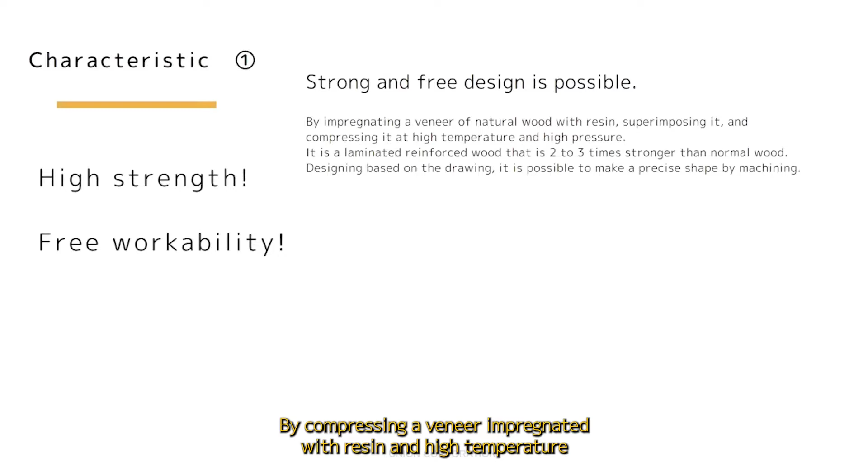We would like to explain the characteristics of Uniwood. The first characteristic is high strength and free workability. By compressing a veneer impregnated with resin at high temperature and high pressure, it can exhibit 2 to 3 times the strength of ordinary wood. Due to this high strength, precise processing with free design is possible.

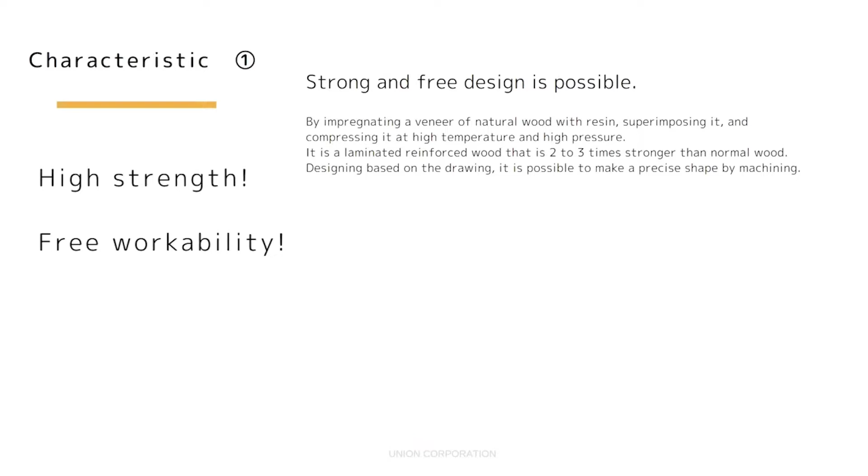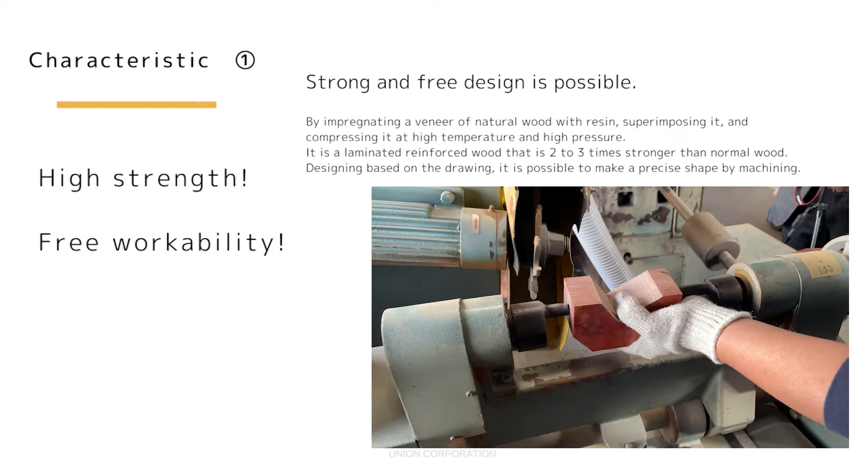Now, let's take a look at the processing of the lever handle UL502. You can see that it can be processed in any shape.

The high strength of Uniwood also enables direct tapping. There is also a video of tapping, so please have a look.

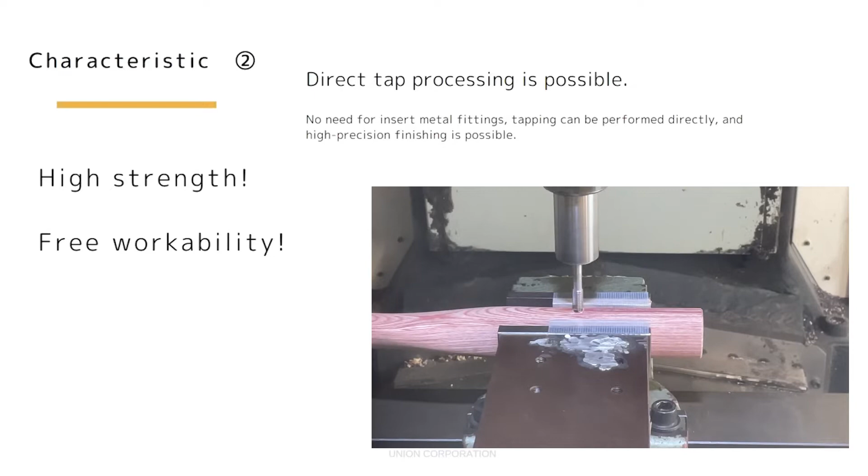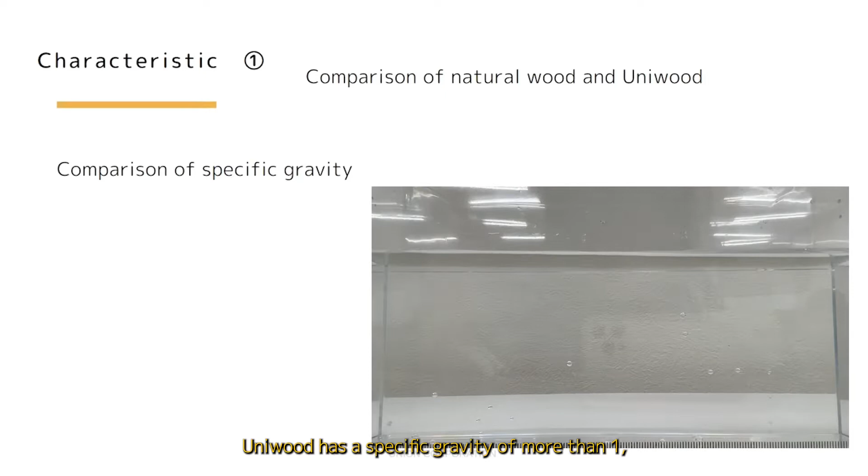Next, we compared the specific gravity. Uniwood has a specific gravity of more than 1, so it sinks in water. Although it is made of wood, its high density makes it stronger.

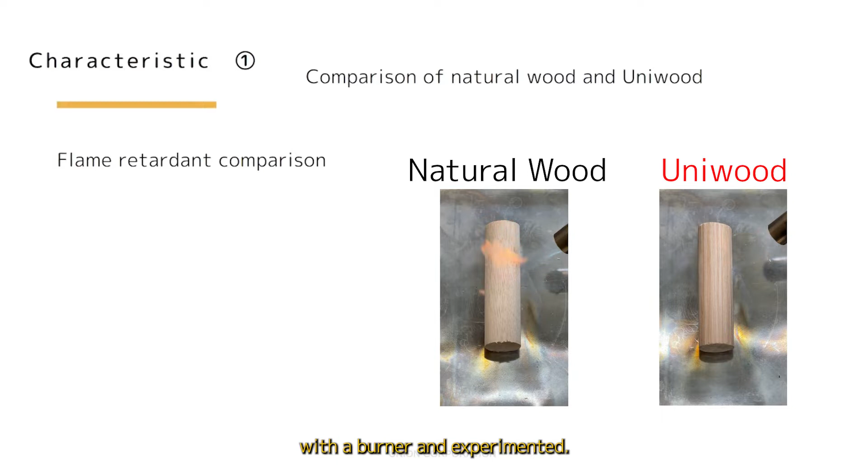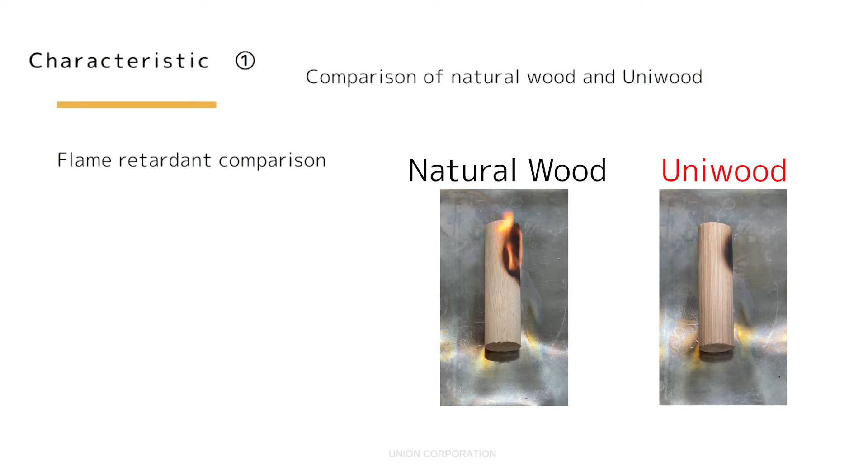Lastly, a comparison of flame retardancy. We actually scorched it with a burner and experimented. Natural wood burns, but Uniwood only burns the surface and does not catch fire. In this way, it is a flame retardant material.

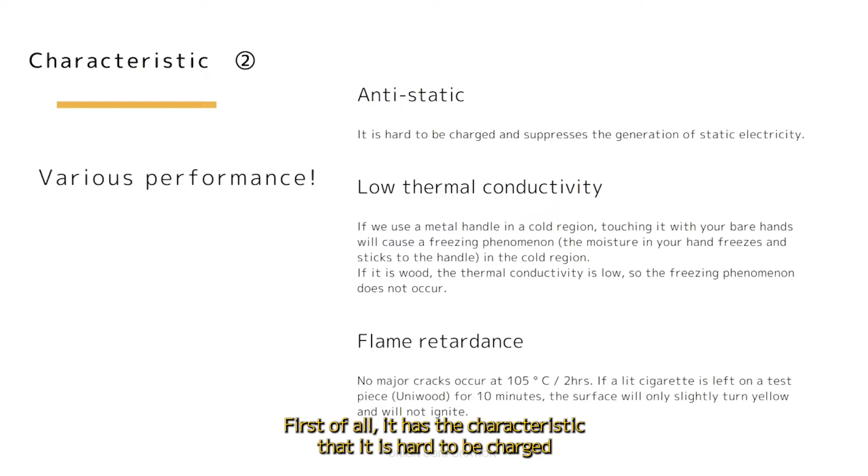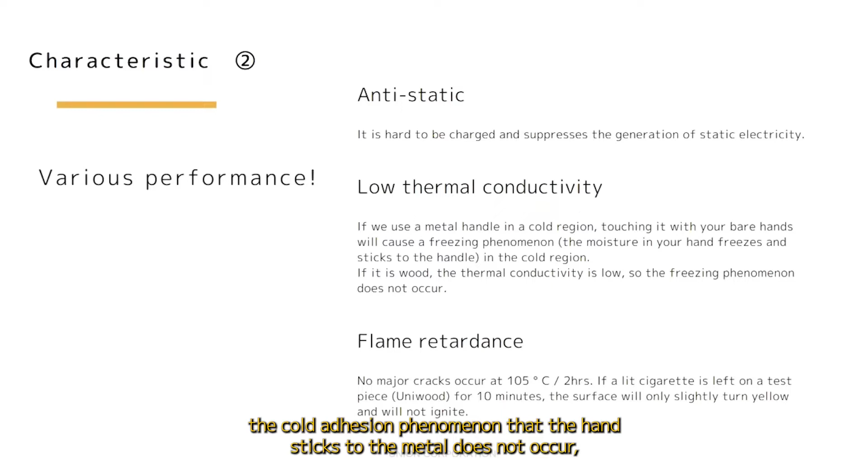Next is that it has various performances. First of all, it has the characteristic that it is hard to be charged and the generation of static electricity is suppressed. In addition, since the thermal conductivity is low, the cold adhesion phenomenon where the hand sticks to metal does not occur, especially when touching metal with bare hands in cold regions.

Also, as in the previous experiment, it has excellent flame retardancy, and even if a lit cigarette is placed on a Uniwood test piece and left for 10 minutes, the surface will only slightly turn yellow and will not ignite.

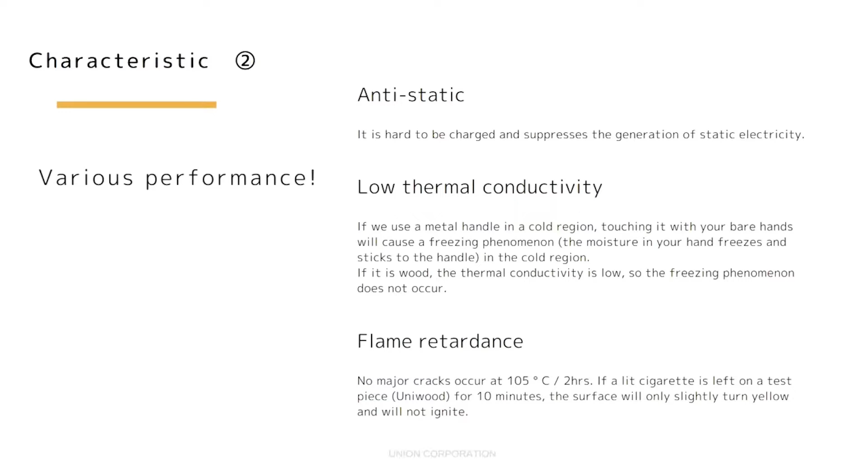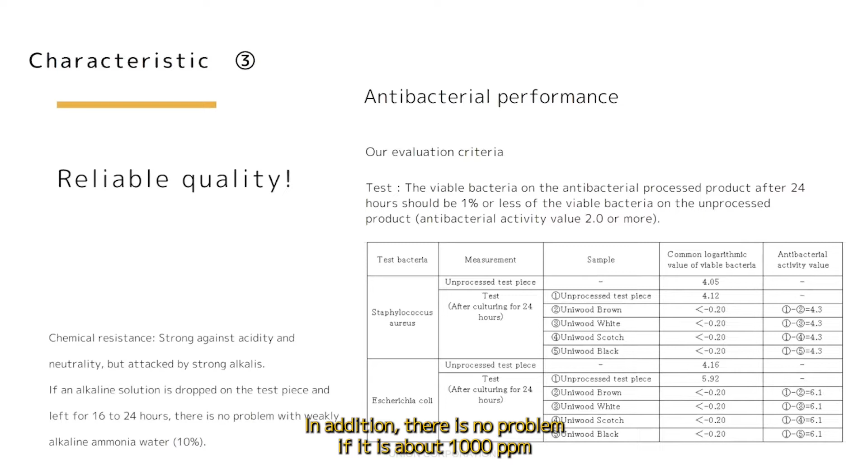In addition, it is strong against acidity and neutrality as chemical resistance. There is no problem with alcohol resistance, so there is no problem with disinfecting with alcohol. However, it is attacked by strong alkali. There is no problem if it is about weakly alkaline ammonia water 10%. In addition, there is no problem if it is about 1,000 parts per million sodium hypochlorite aqueous solution used for coronavirus countermeasures.

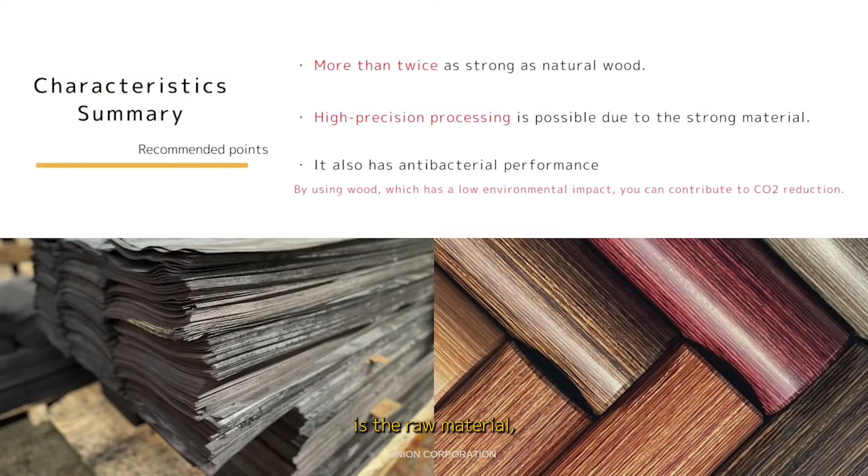To summarize the characteristics: 1. It is more than twice as strong as natural wood. 2. High precision processing is possible due to the strong material. 3. It is a material that also has antibacterial performance. In addition, since wood, which has a low environmental impact, is the raw material, it is a material that can contribute to CO2 reduction. Next, we will explain the manufacturing process of Uniwood.

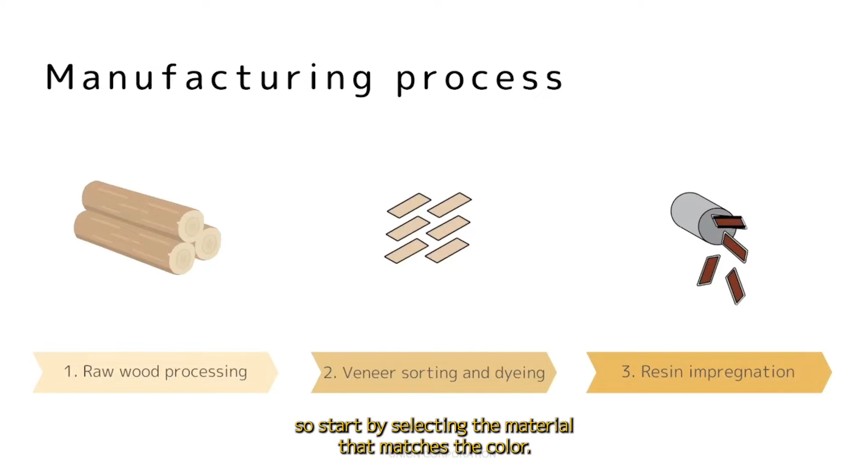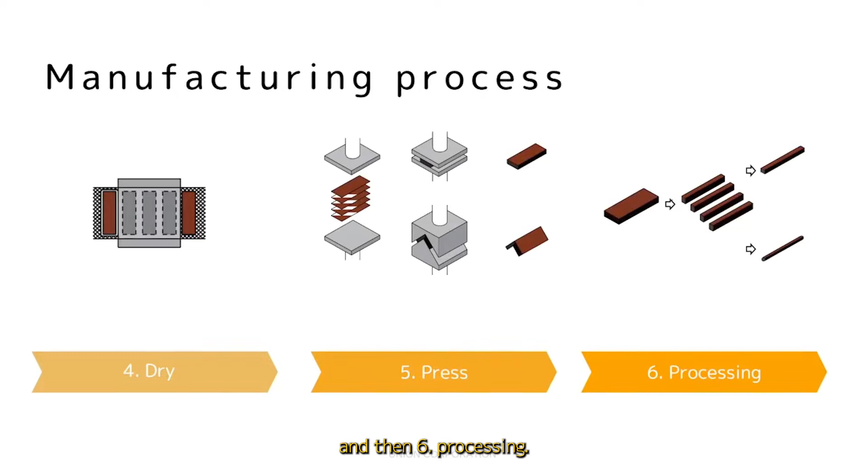First, we process the raw wood, which is the raw material, into a veneer. Next, sort the veneer. Uniwood has multiple finish colors, but the veneer used depends on the color, so start by selecting the material that matches the color, then dye it in the finish color. Next, impregnate it with resin to increase its strength. After that, dry well. Then press at high temperature and high pressure. And then process it. Now we would like to introduce the manufacturing process so far with a video.

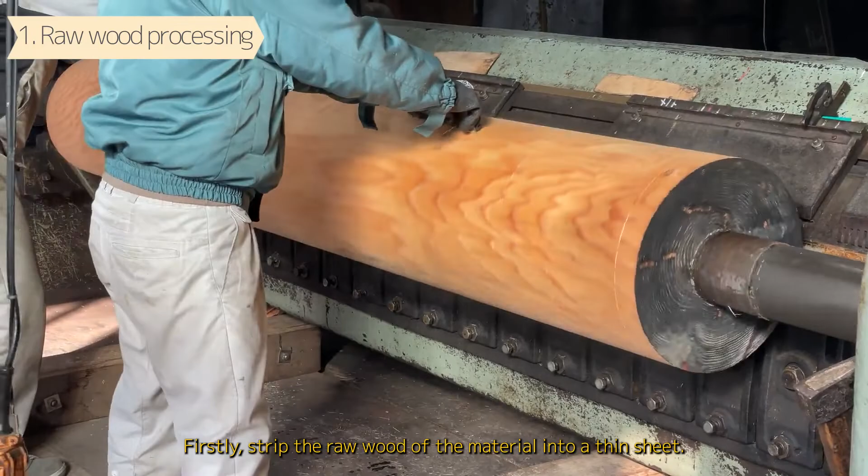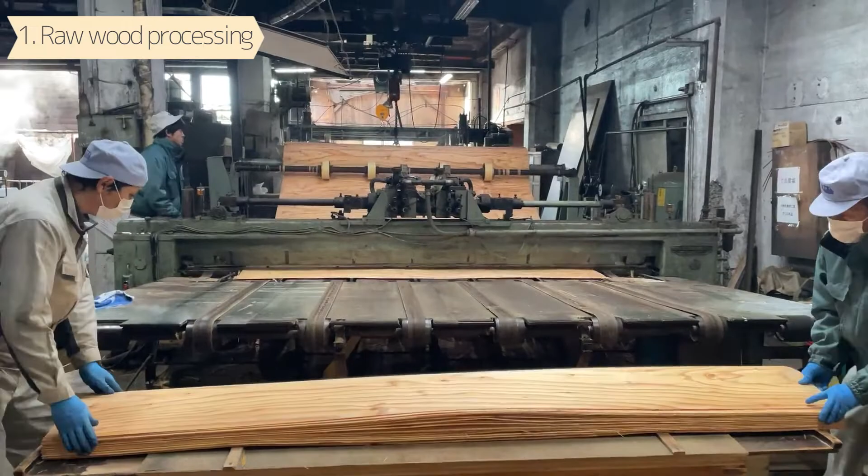First, strip the raw wood material into a thin sheet. The steam is coming out by soaking the raw wood in hot water to make it easier to process. Cut it short for processing and arrange it into a plate shape. Check the knots, etc. of the plate-shaped product, and sort by product type.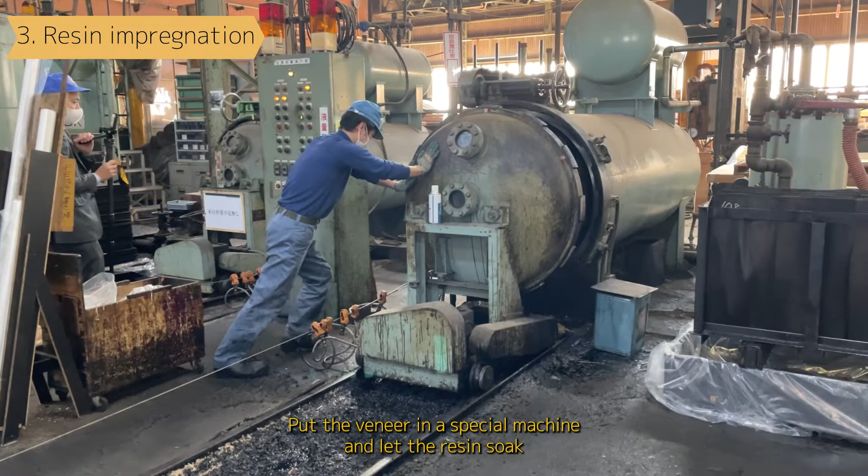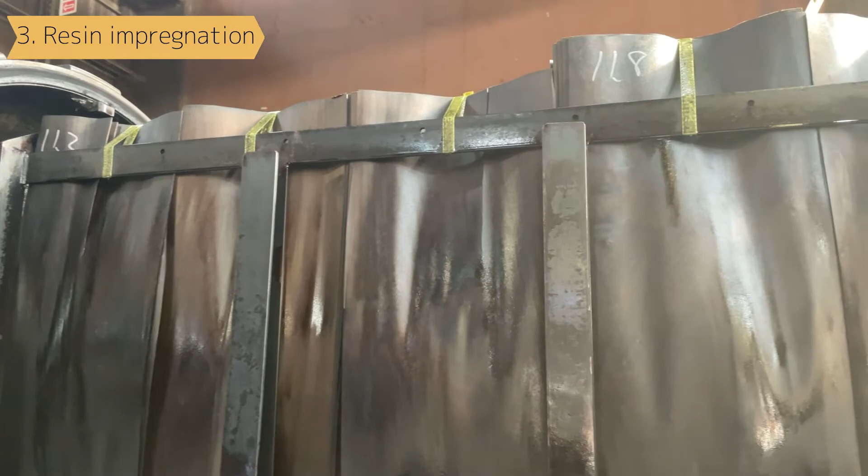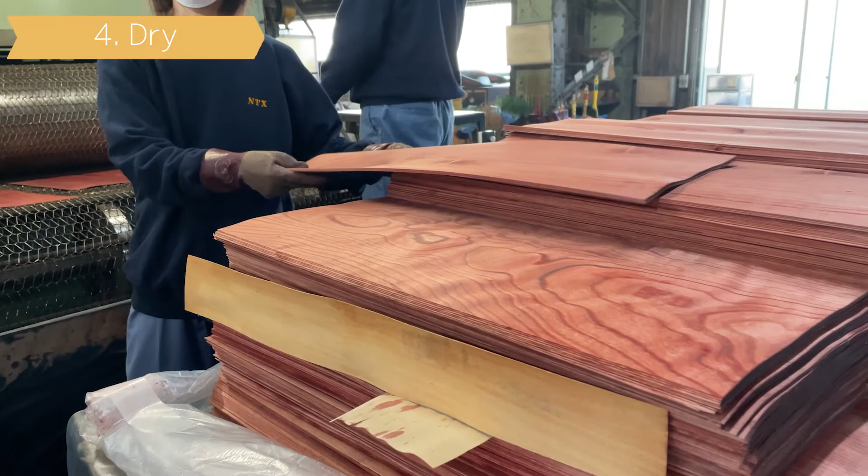Put the veneer in a special machine and let the resin soak into the inside of the veneer while applying pressure. Dry the veneer impregnated with resin in a dryer for 30 minutes.

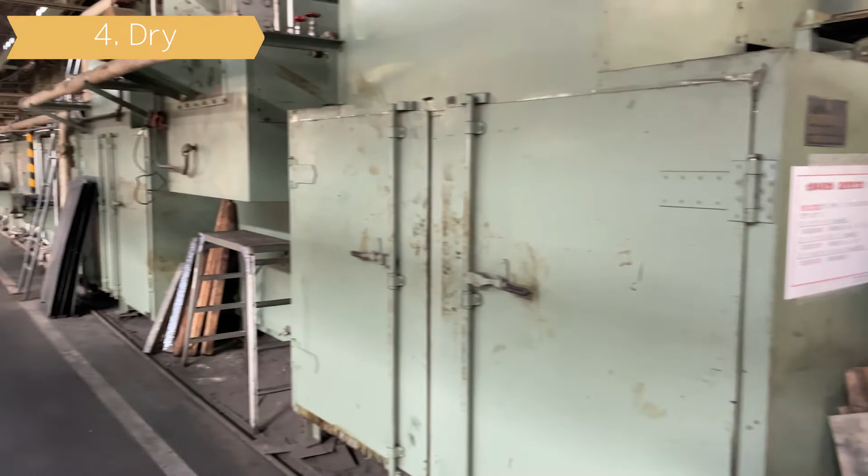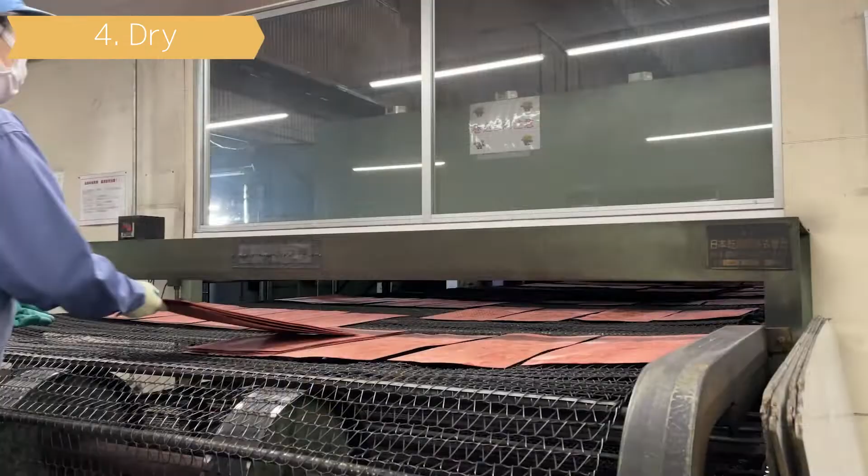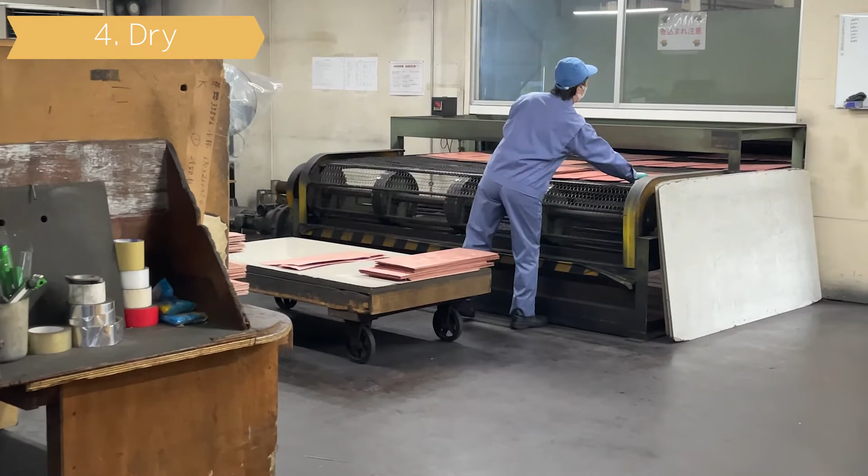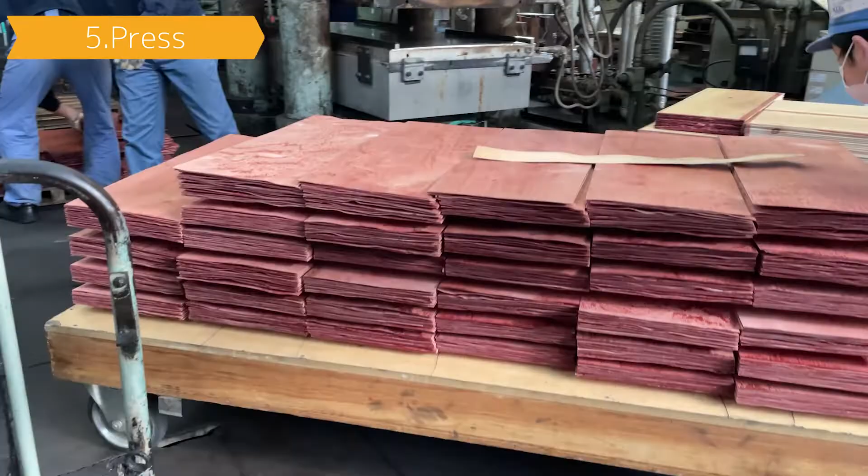The dried veneers are put together for each fixed number and proceed to the next pressing process. Set the dried veneer on the press and slowly apply pressure.

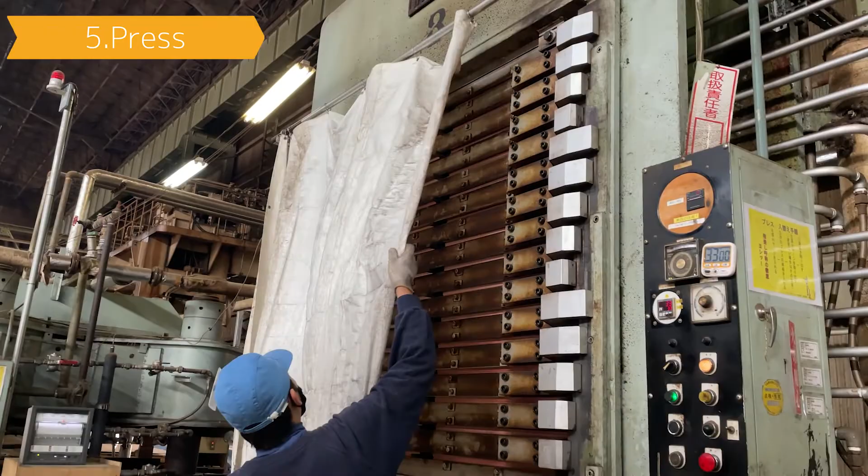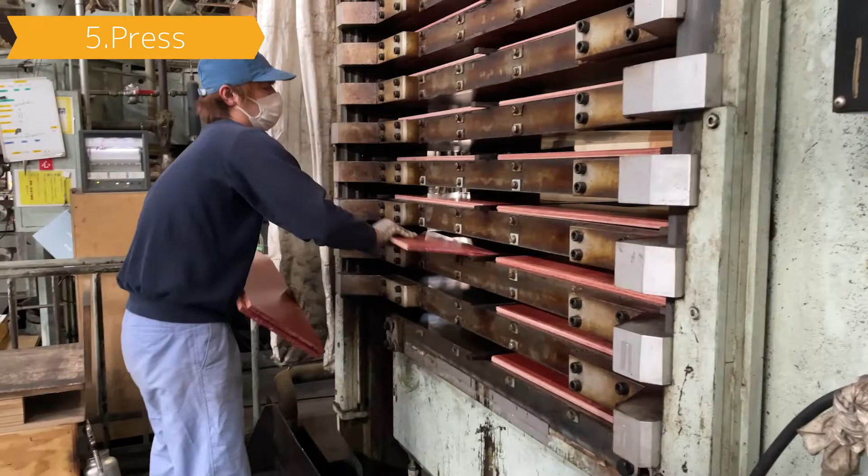About an hour and a half under pressure. It slowly dries under pressure to harden and complete the laminated reinforced wood.

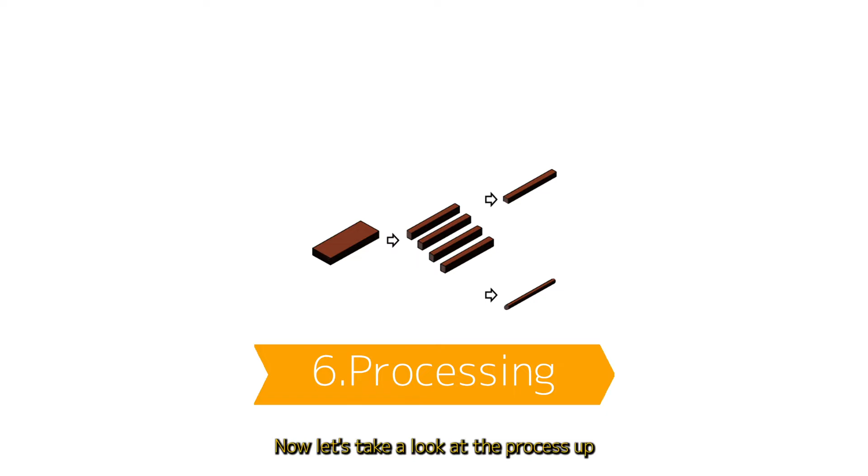From here, we will proceed with processing for each product. Now, let's take a look at the process up to the completion of the new product UL1082.

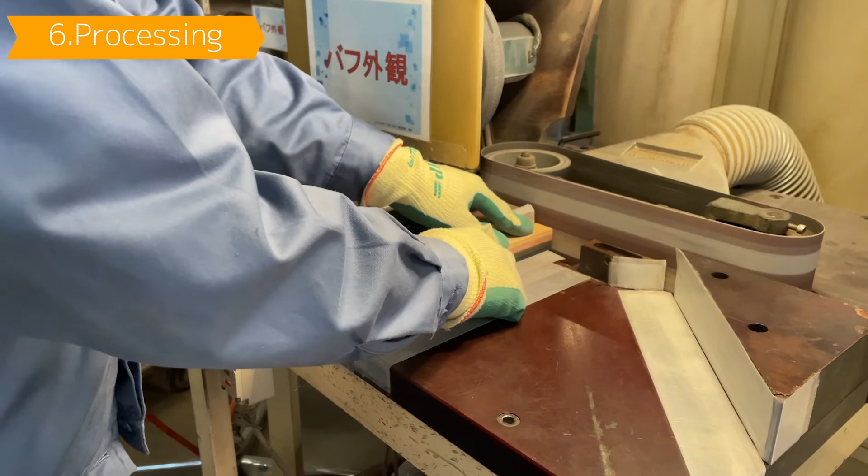We will process random Uniwood with 4 colors of Uniwood layered on top of each other. First, polish the cut surface. Next, chamfer. Shave with a dedicated shaving machine to create the diagonal lines that are characteristic of the product.

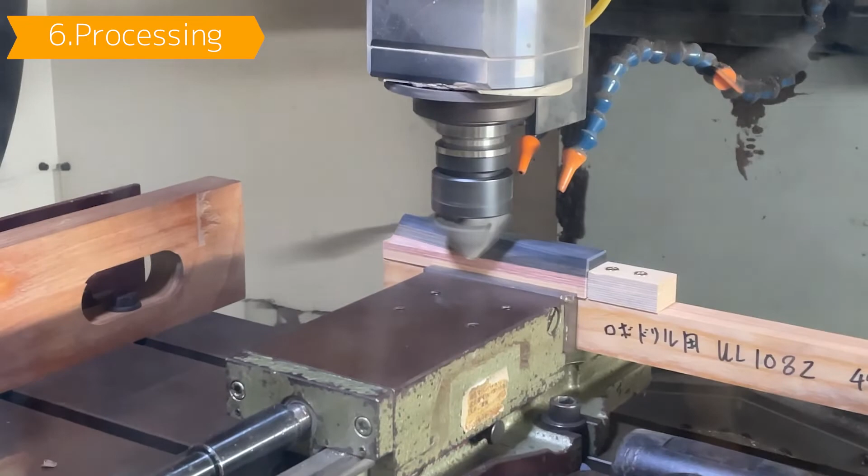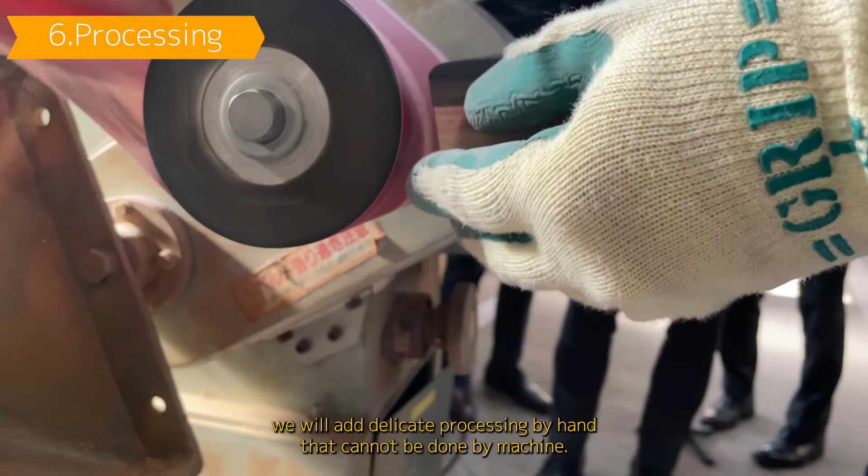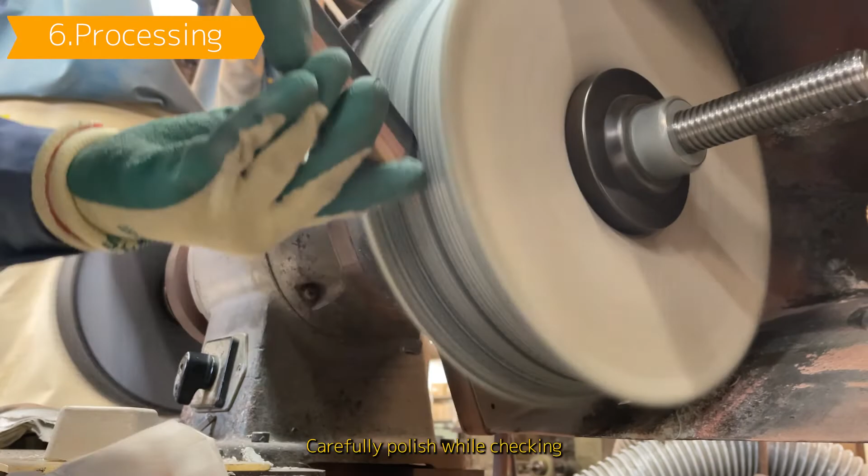Since the cutting surface is rough, we make the surface smooth. Considering the grip, we add delicate processing by hand that cannot be done by machine. Carefully polish while checking with the eyes of a craftsman. It is completed by attaching the mounting post.

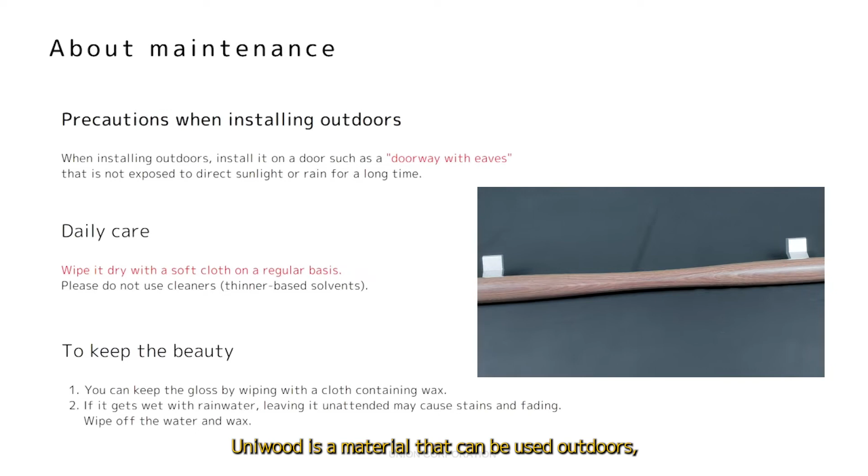Here, we will explain the maintenance of Uniwood. Uniwood is a material that can be used outdoors, but it may be discolored or deteriorated by ultraviolet rays or rainwater. For outdoor installation, we recommend installing in a place with eaves that is not exposed to direct sunlight or rain and wind. It is also possible to regenerate Uniwood whose color has faded.

Please see the video on the right to show you how. For daily care, please wipe it dry with a soft cloth. Please do not use thinner-based solvents, etc., as they may lose their luster.

You can keep the luster by wiping it with a cloth containing wax. Even if it gets wet with rainwater, wipe it off with a soft cloth, polish it with wax, and then wipe off the wax. Leaving it wet may cause stains and fading.

Now, please let us introduce some of the products using Uniwood. Uniwood is characterized by different expressions depending on the grain when viewed from the side in the stacking direction and the grain on the front of the veneer.

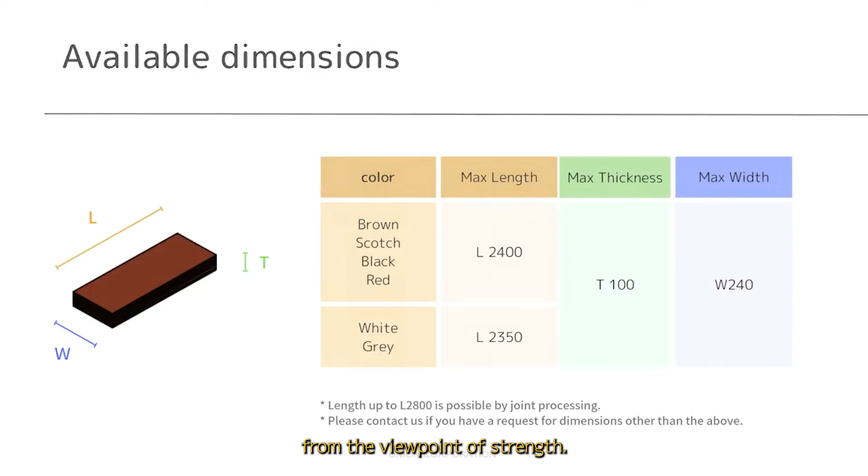Here is the maximum size that can be manufactured. Overall length can be up to 2,800 mm by joining. It is necessary to install the mounting posts near the joint part from the viewpoint of strength. Finishing colors range from white, brown, scotch, black, gray, and red.

Uniwood changes its color deeper as it ages. It is a material that can be used for a long time because the color becomes deeper as you use it.

Uniwood is used in various situations other than the handle, and we will explain various things next. Here, we would like to introduce a custom-made example other than the handle.

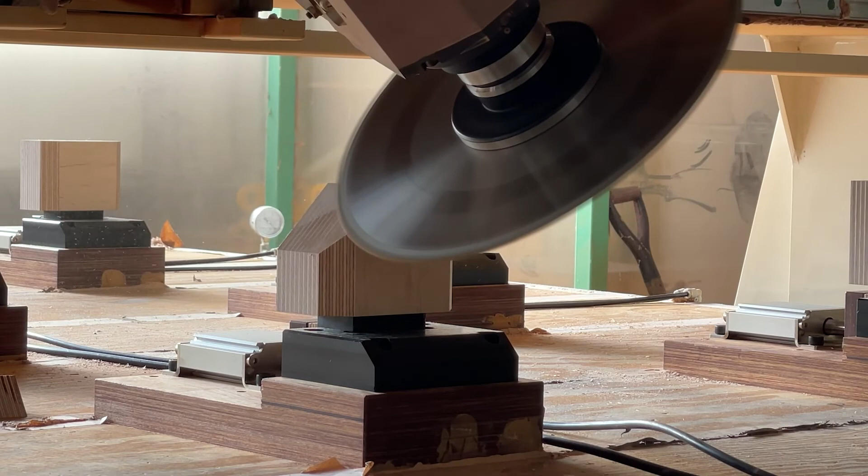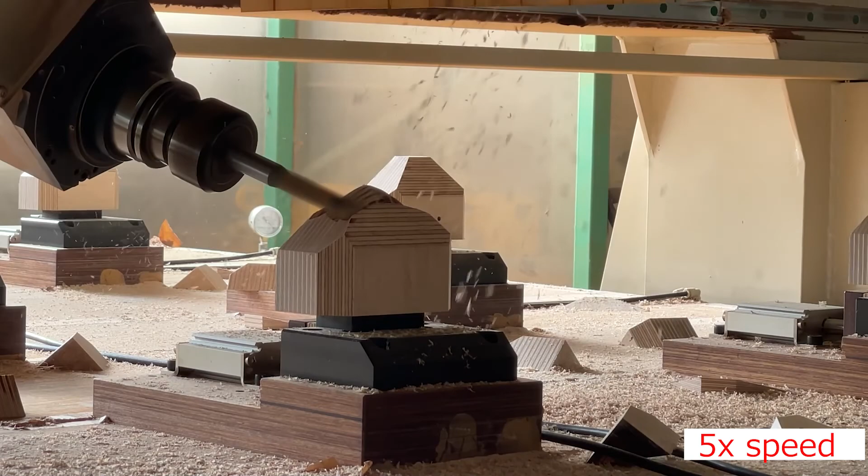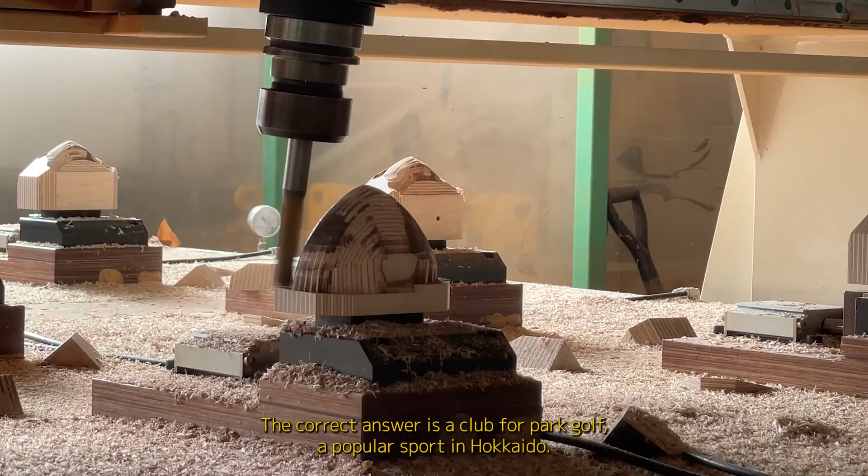Now, we would like to show you the manufacturing process of something. Do you know what will be done? The correct answer is a club for park golf, a popular sport in Hokkaido.

You can see that the characteristics of Uniwood are utilized in various fields.